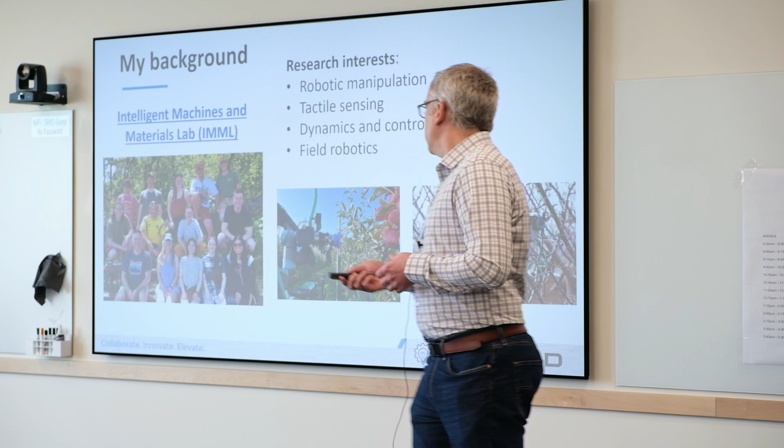I was fortunate to work with a great team. I was joined by co-PI Professor Naomi Fitter, also an associate professor—you'll hear from her later, she's in the back of the room after the break. We also had two PhD students in robotics, Marcus and Trinity, working on this project. Our collaborators at Boeing, Leon and Melissa Johnson, really helped us scope the applications this project was designed around.

So what was this project all about? We wanted to automate tasks requiring dexterous manipulation of deformable things—cables, hoses, wires, fabric. Dexterous manipulation is one of the grand challenges in robotics, but it's typically been confined to R&D facilities like university research labs, without much transition to use in industry.

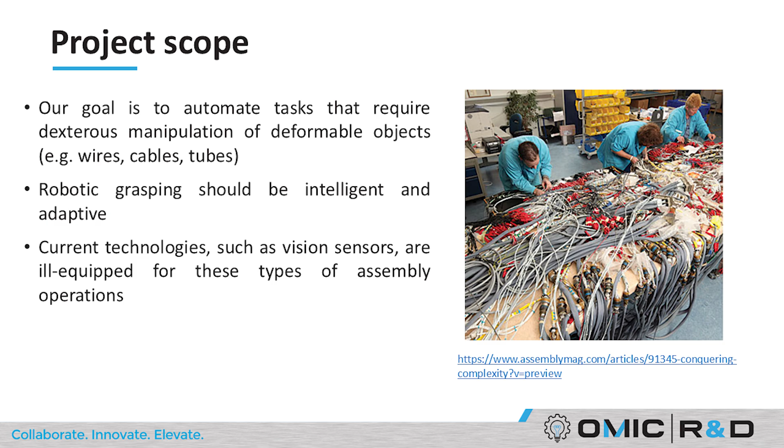We think robotic grasping should be intelligent and adaptive—meaning we try to minimize the constraints or fixtures we have to add to the environment, and minimize the controls we add. We want to do these tasks with single-use grippers adapted for multi-purpose tasks, using sensing within the gripper itself, because vision sensors are often ill-equipped for these deformable object applications.

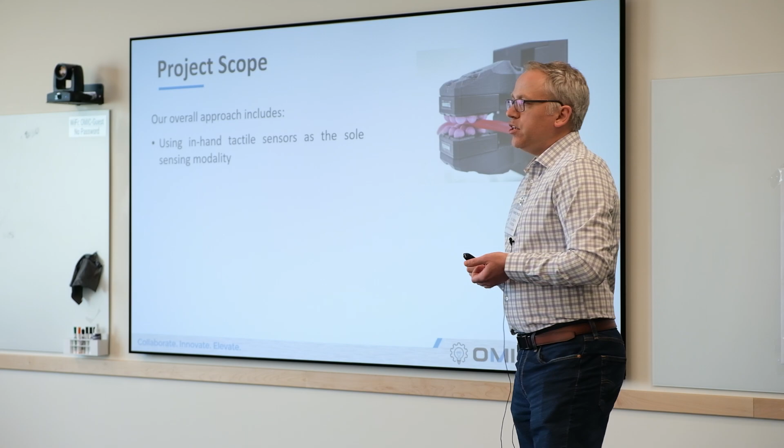Our approach focused on using in-hand tactile sensing as the sole sensing modality. We purchased an off-the-shelf sensor from a company in Sydney, Australia called Contactile. The sensor is about a 1 inch by 1 inch square, with 9 pink pillars on each one. Each pillar has a couple of LEDs that shine light up towards a reflector at the top of the sensor.

And that reflector, as it gets moved around by something pushing on those pillars, it changes the light pattern on these photodiodes down below. The company has its own internal model that says, based on these patterns on the photodiode, this is getting applied this way with certain shear force or normal force or whatever. So that's provided by the sensor software.

And then our other technique is we wanted to leverage data-driven techniques to train robot controllers to manipulate these deformable things. And where we got a lot of help from Boeing was linking our experimental studies to industry-relevant use cases, and we focused on two use cases.

The first was how do we estimate the pose of a cable inside the gripper, and how can we use that pose, how the cable is positioned with respect to the end effector, to trace cables with the robot. And the other one was doing a connector verification check. Can we use this tactile sensing to verify whether or not we have a proper connection?

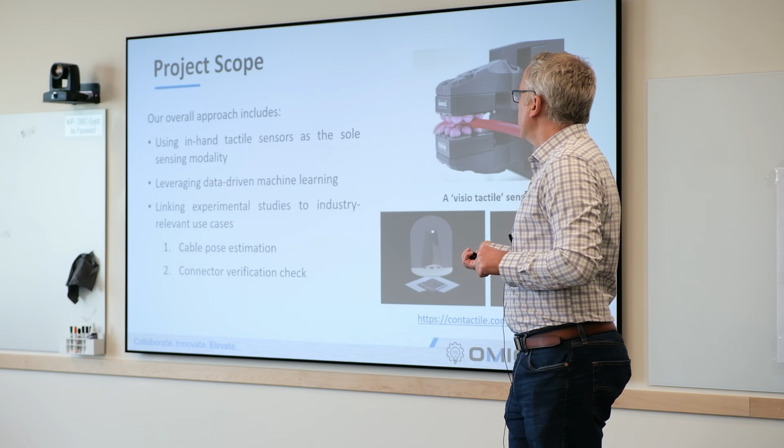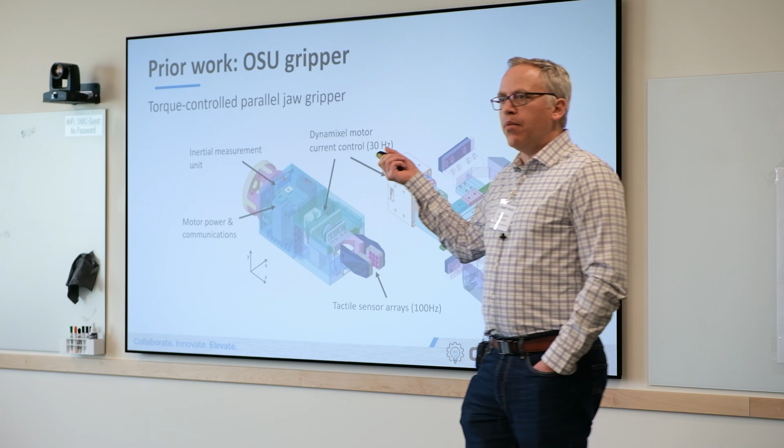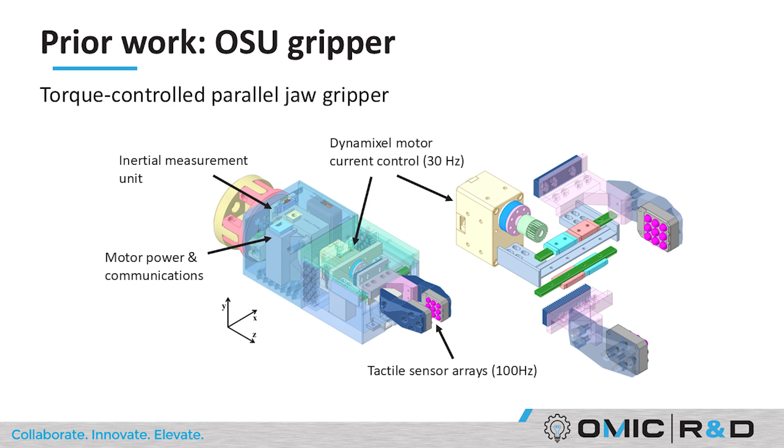And we were looking at electrical connectors specifically. So we were able to leverage some of our earlier work, and we designed a gripper for this project. It's not particularly interesting or novel, but we designed it because we needed a platform that would integrate well with these sensors. So this was a parallel jaw gripper. It has these two fingers that are driven by a rack and pinion system. We have a torque control actuator, and we use some robot operating system as the middleware to control this thing.

The first challenge that we had to overcome is, we want to use machine learning and techniques from AI. That requires lots and lots of data. We're going to use supervised learning. That means we need ground truth labels associated with our data. And so we needed to come up with a couple of different test beds to generate this data set.

And the first test bed we created was using this camera setup. If you're familiar with supervised learning, a lot of times maybe you want to train some AI model to make sense of images. And that requires someone to look at an image and trace pixels in an image. That process is really slow, no one likes it, and it's tedious. So we wanted to find a way to automate this labeling process.

And so this is the test bed that we did. You can see this setup here. We have this camera pointed down. We have our gripper with the cable, and we can use these different jigs to change the curvature and position of the cables with respect to the sensors.

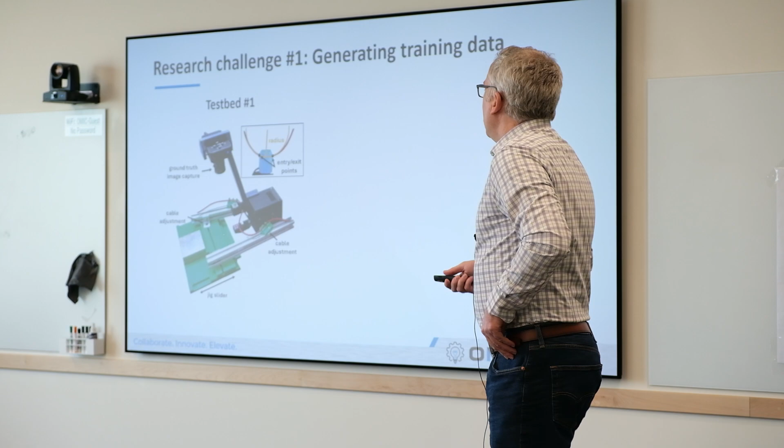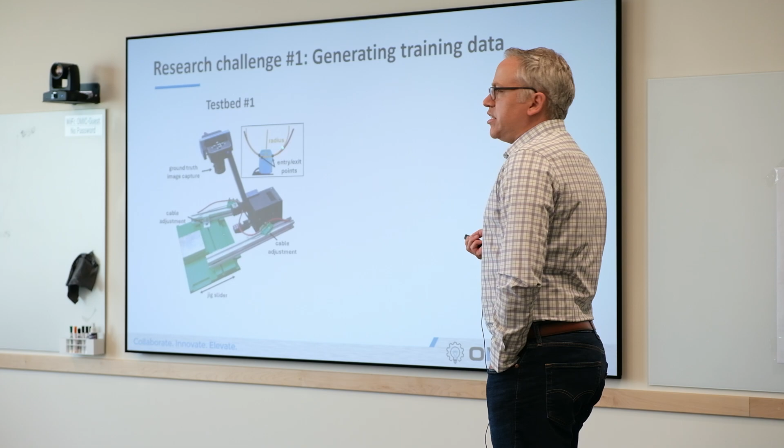And then what we do is we use color segmentation because we have a red cable against a green background. Very simple technique to identify the radius of curvature of the cable, and the entry and exit points for where that cable leaves the sensor and the gripper.

And the other test bed was for this electrical connection check. Pretty straightforward jig. We have magnets with different magnetic strengths, and then we have some copper tape that creates an electrical connection across that interface, across these two strips of the magnetic plate. And we use those magnetic plates to represent different connection points. This is a proxy to represent different connection points at different tensile strengths for that desired connection.

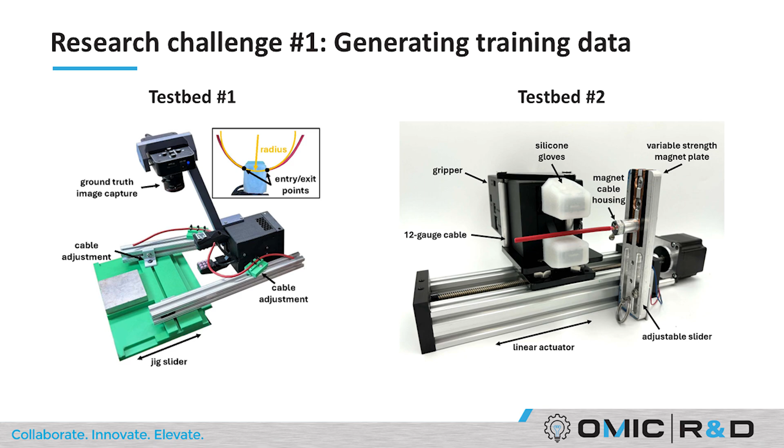And we have an actuator down below that can move the gripper back and forth. So this is our test bed for generating the data set to train the electrical connection check.

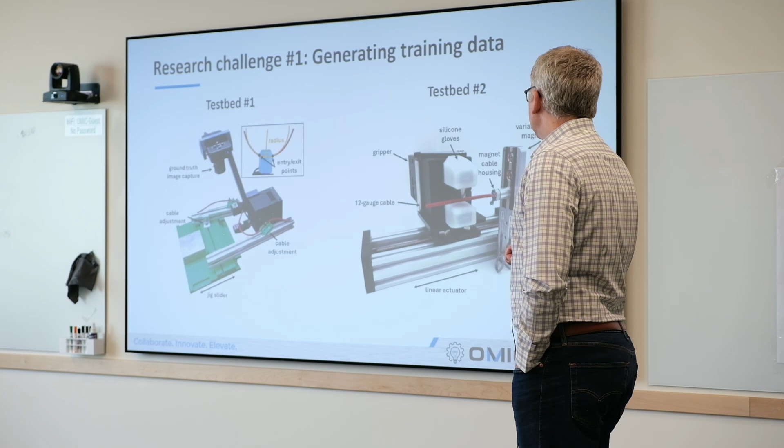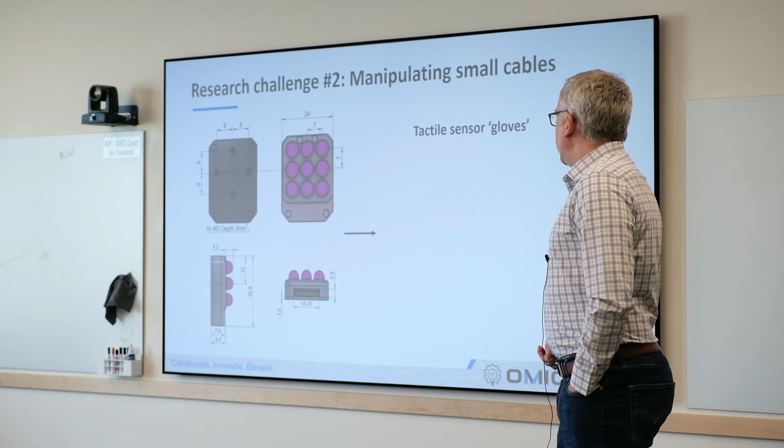And the other challenge that we came up with is we're using an off-the-shelf product. It has a certain form factor, and that form factor includes some air gaps in between the individual pillars. But if you want to manipulate really small wires, the problem is those wires sometimes can seat in between those different pillars based on their diameter. So we needed a way to modify this to be able to manipulate really thin gauge wires.

And the way we did that is we overmolded what we call gloves, rubber gloves, over the top of the silicone pillars. So anywhere on this silicone surface where you may get some kind of loading, that gets transferred to the sensors underneath.

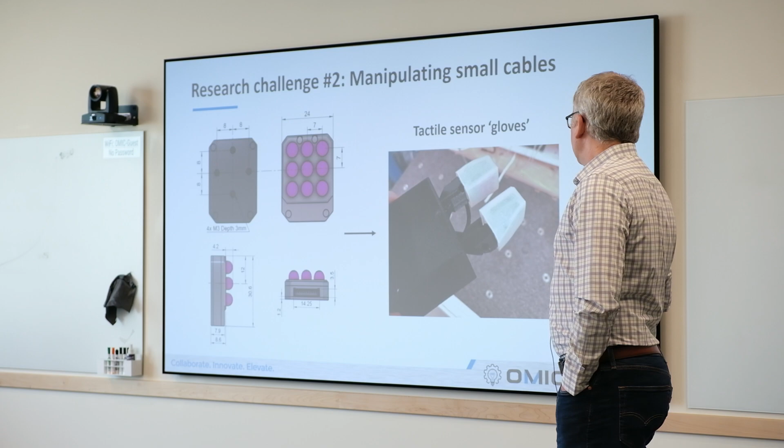The first major outcome we had for the project was training a neural network to estimate the pose of the cable. We're trying to learn the radius of curvature, so we don't assume the cable is straight or linear between the sensing paths. We assume it's bent or has some curvature, so we want to estimate that curvature, and then estimate where it enters and exits. From that, we can extrapolate in space where the rest of the cable is going in 3D space that's not actually being gripped by the robot. So that's what we want to learn.

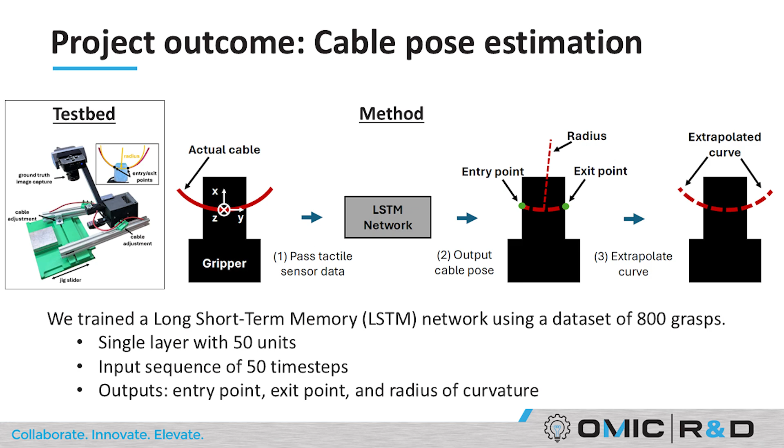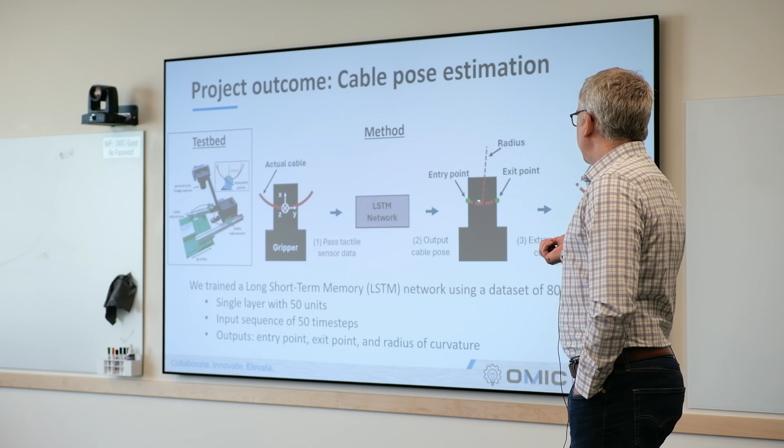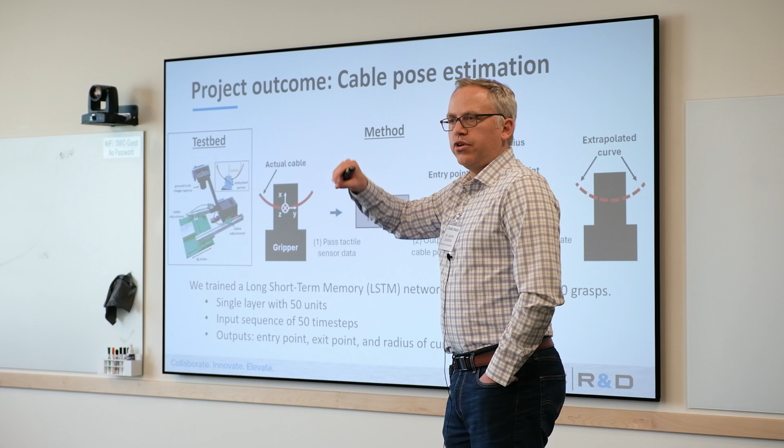We use a specific type of network called a long short-term memory network. It takes sequence data, time series data from these tactile sensors, and tries to learn those three things I just pointed out. We take 50-timestep sequences of time steps, pass them through our model, and it predicts entry point, exit point, and radius. Then we extrapolate that curve out, and from that we try to predict how a robot tracing a deformable cable would move in space. So: grab, predict, extrapolate, grab, predict, extrapolate.

We integrated this gripper and these sensors with the UR5E industrial robot from Universal Robots. It's a platform that we already have in my lab. Let's see if I can get this video to play.

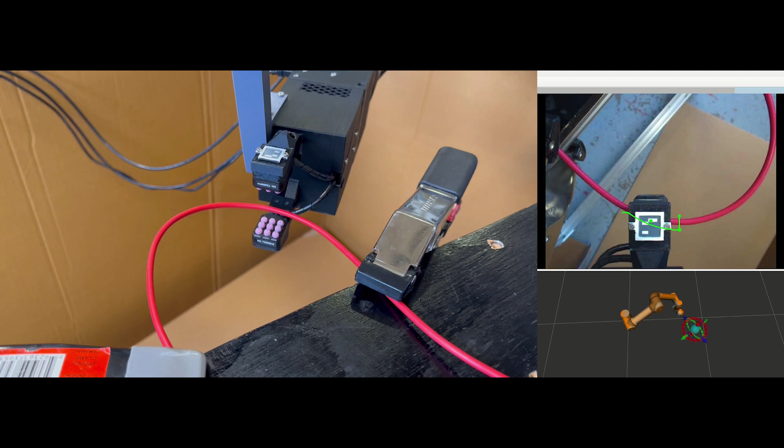It's making these predictions right here—this green line is the predictions. It's not using any camera, any vision. It's purely making these predictions and that extrapolation, following that path based on the sensing it has within the gripper.

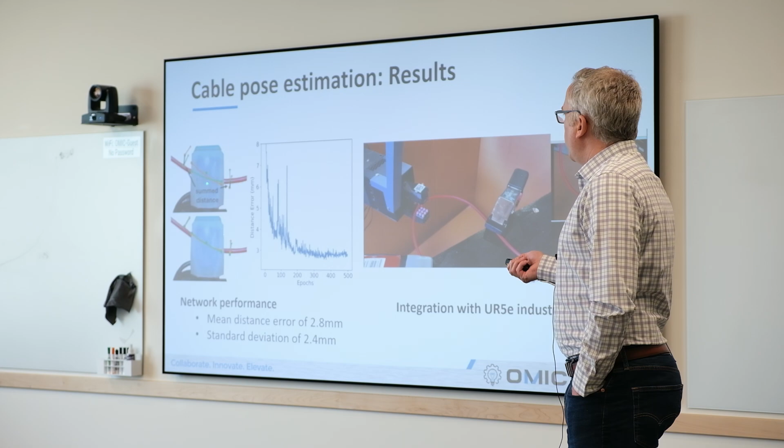This example up top was one where there was a poor prediction from the trained model, and this example down below is one where there's a good prediction.

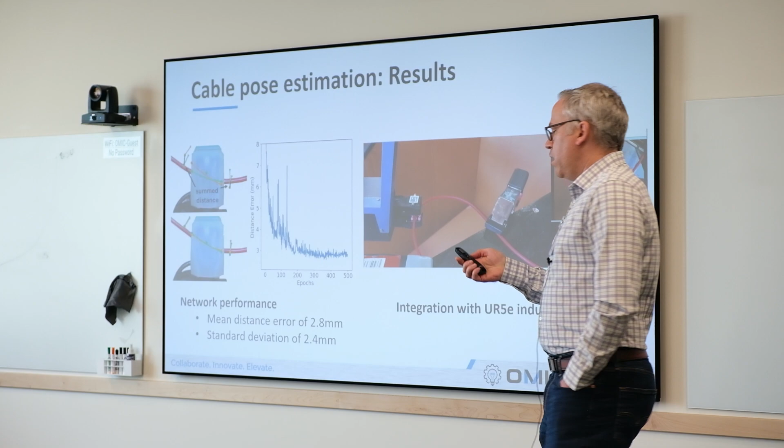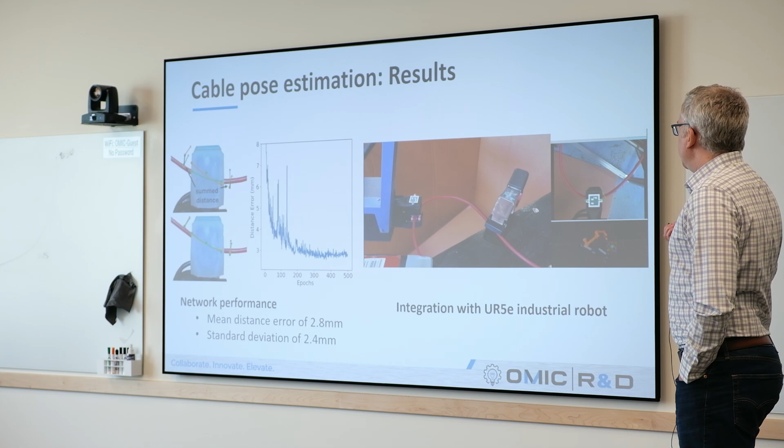Question: when the robot travels along the curvature, is it a pre-programmed path, or is it deciding on the fly? Answer: Everything's on the fly. What's happening under the hood is at every time step where it's making the grasps, it's predicting the cable is shaped this way, entering and exiting here. We think the cable is positioned down in space, we need to go to this next point in space and grab it there. There's nothing pre-programmed.

Just a couple of additional demonstrations of different cable poses.

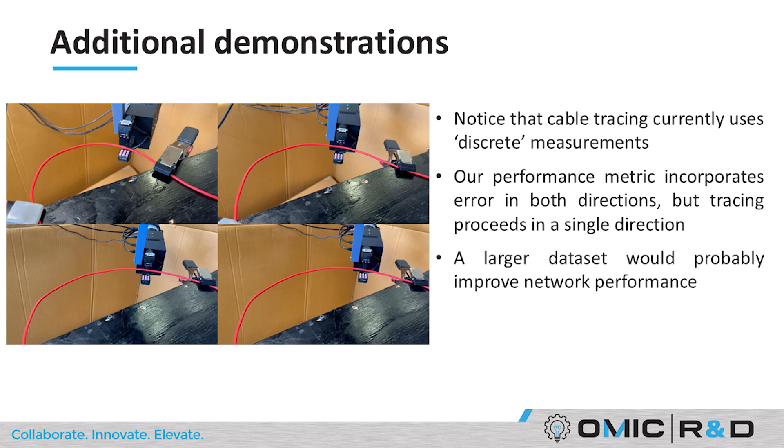Notice that right now everything's discrete—it grabs, predicts, moves; grabs, predicts, moves. It's not sliding continuously. Tracing proceeds in a single direction, so we're off by about 1 millimeter in our current model. We trained this network with 800 grasps, and that sounds like a lot, but it's really not for machine learning. If we increased the size of our dataset with our test beds, we could probably get model performance quite a bit better. It just takes a lot of time and effort to do that.

The other milestone on this project was doing this electrical connection test, and we don't even use machine learning for this one. All we do is we have this actuator, grab the cable with the gripper, and move this actuator back and forth, and these sensors provide an estimate of the shear force across the surface of the silicone rubber. We take that shear force, and as we start to pull, we can tell whether or not the cable is actually slipping.

The way you detect slipping is you see a little bit of relaxation in that shear force as you're pulling—that tells you the cable is slipping. And so we use that as feedback to actually squeeze harder.

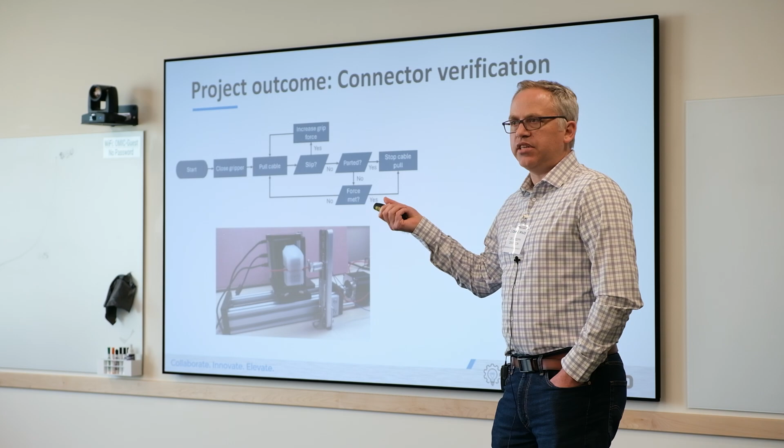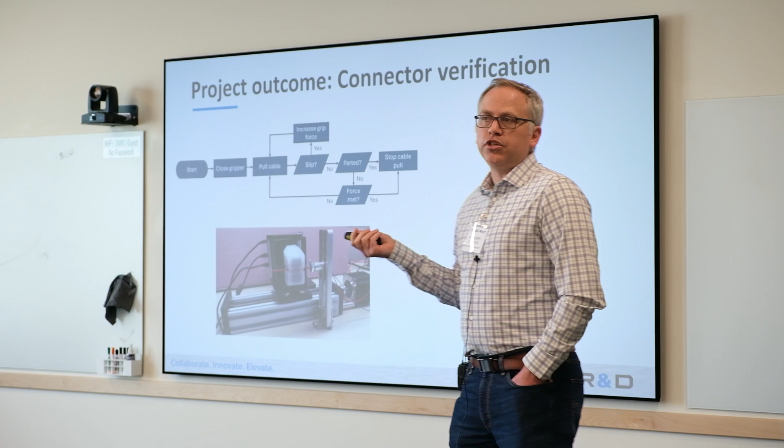And then eventually we come up and we say, have we reached a certain threshold for what our desired tensile force is for this electrical connection? If we have, that's a successful test, it's passed. But if you separate, which we can tell with the shear force, if you pop the connection at a threshold that's lower than your goal tensile force for that electrical connection, you say that was a failed test. So a very straightforward way to see if you had a pass or fail in this test.

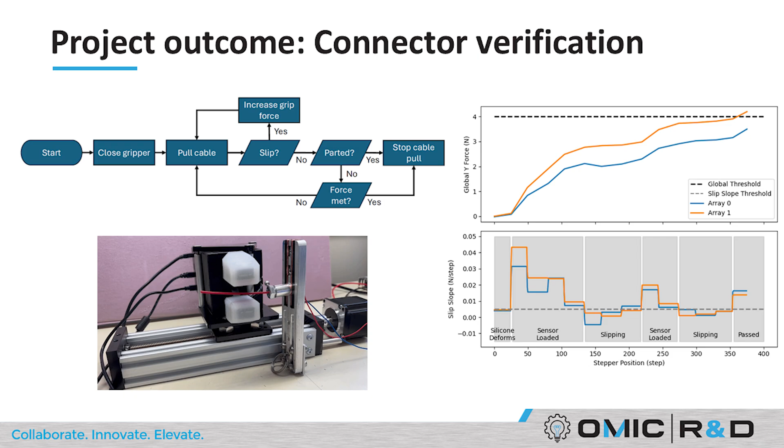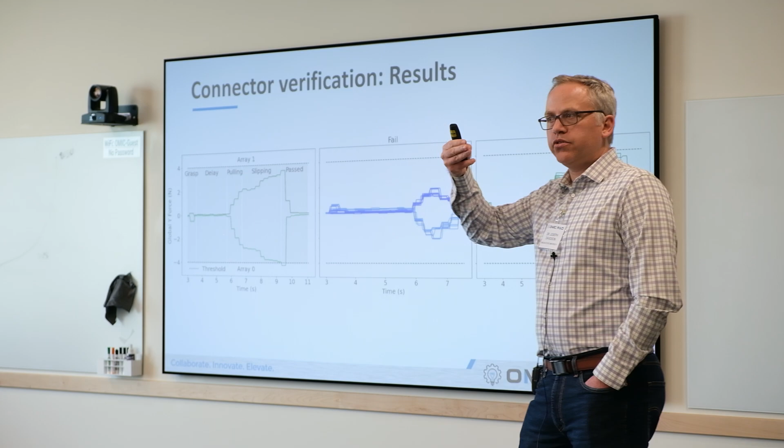And 10 different tests on, we can use that magnetic array, those 3 different values. We can say low, medium, high for a particular goal tensile force for an electrical connector. And actually, it worked better than I expected. So far, just using this simple first principles method, we're able to get pretty close to 100% success rate on fail or pass.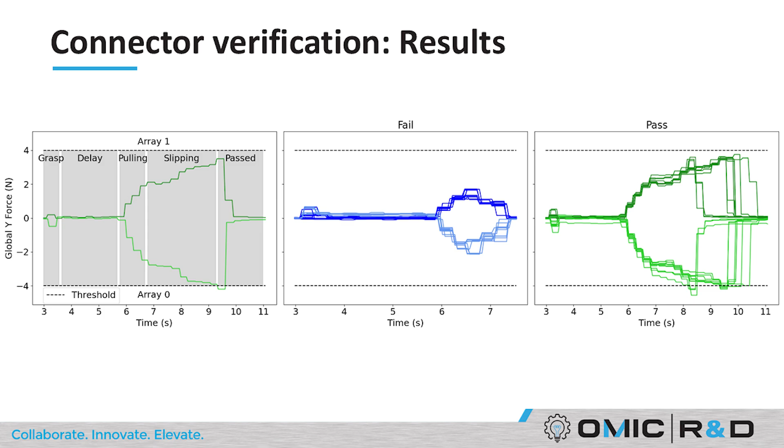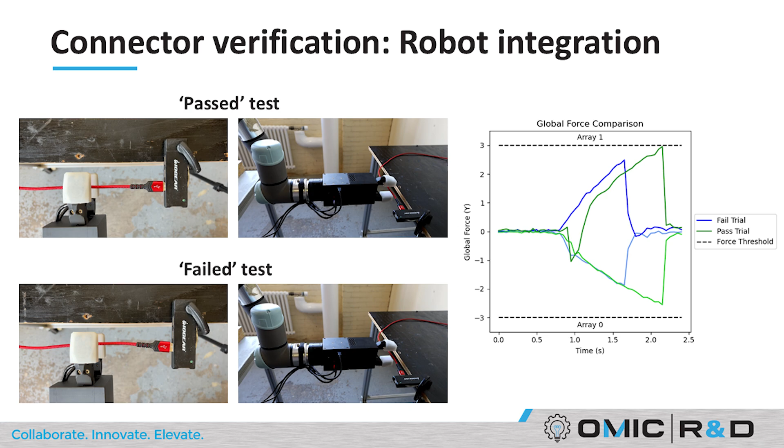And again, simple demo with the UR5 where you take a USB cable, you can seat it, or you can make it a little bit offset, and you can use this technique to say, hey, do we have a good connection on the USB cable and the receptacle?

So that was a pass test. The classifier said it passed. This is one where it fails. And the classifier said, hey, this one failed.

And results of the test here. Blue signal, we didn't hit our threshold. It separated before we hit that shear tensile force threshold. That failed. And hey, we hit our goal force. This one passed.

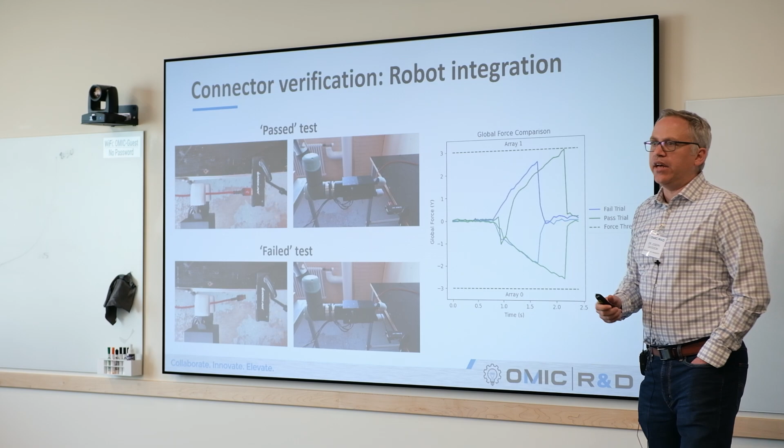So where could this work be useful in any other application or manufacturing? Well, I think it could be useful where a robot needs to trace a deformable linear object, especially where you have some setup where visual perception and cameras might be degraded. So that could be continuous cable tracing, cable routing. Maybe you need to be able to trace a cable, or maybe you need to be able to route a cable around fixtures or constraints.

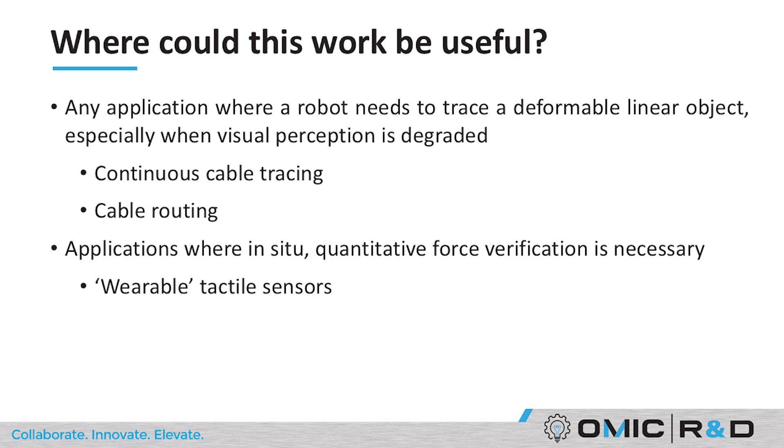It can also be used in applications where maybe you need to do some kind of in situ quantitative force verification. So we've thought about, well, maybe if you have workers that are performing some type of test, and right now it's very subjective because we're relying on human expertise, you would actually be able to have quantifiable data that says this connector is seated. You could actually wear these sensors as a worker rather than having to put it on a robot.

Okay, so we published this work at ASME, had its annual conference in Portland last November, so we published that. And this project actually, it ended last summer, but we have continued to work on this area of tactile sensing, parallel work that's been funded by the Navy.

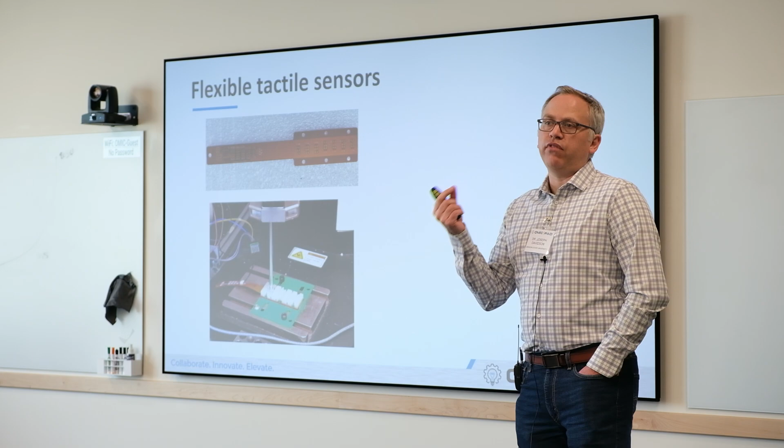And there's some limitations and constraints when you're using these off-the-shelf sensors that are rigid. So what we've really been spending a lot of time on is how do you make flexible tactile sensors that you can shape and contour around any type of surface or any type of gripper. And this is what it looks like, our current design. So this is a flexible PCB. We take this flexible PCB, and we put the barometric pressure sensors on each one, and then we encase those barometric pressure sensors in silicone. And now as you press on the silicone, as you press on the rubber, that's picked up as an increase in pressure that the barometric pressure sensor measures.

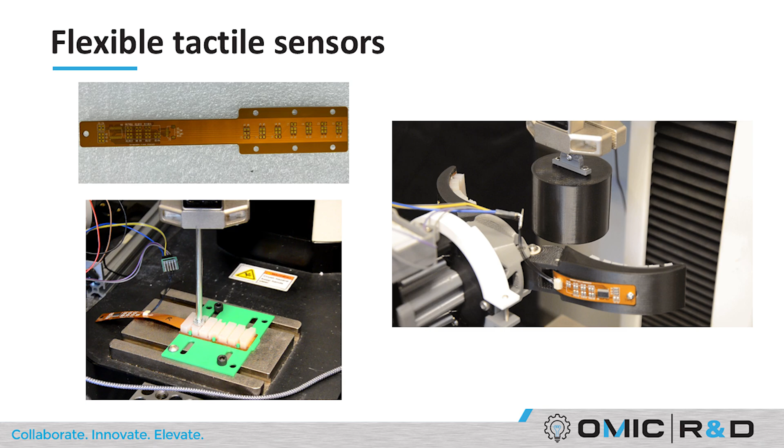And so this is what it would look like. Again, they're flexible, so you can contour it around a curved surface. And what we're doing now, these are videos from last week, is we have a materials testing machine. We're artificially causing objects to slip across these sensing surfaces, and we're training classifiers that say, hey, we think this object is slipping, you have some kind of slip happening. How could you compensate that through control?